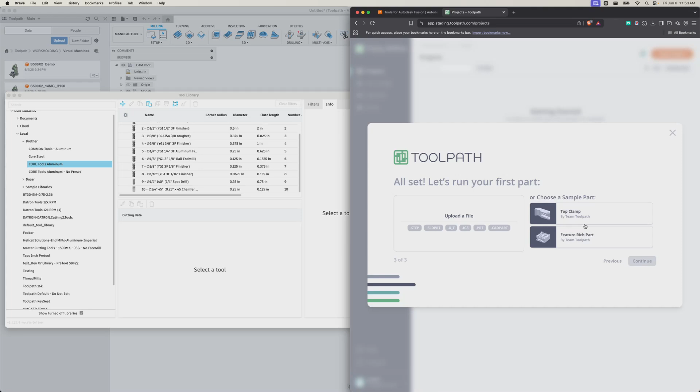So we're going to build out your machining process now. I'd already chosen aluminum there, and I'm going to upload a file. You could pick one of our test parts if you don't have one, but I'm going to grab this steering adapter part that Scott Moyse gave me. And we can see that that's running.

While that's running, I'll show you what's happened in the Libraries tab. That CORE Tools Aluminum library has shown up. I've already had that one prepped for Toolpath, so we'll leave that be. But also it created a cut config for you with that tool library selected. Cut configs are how you tell Toolpath how you like to machine, different processes and things like that. And then it also pre-populated that with some recommendations. Here we have Kennametal and Harvey tools and some generic drills, countersinks and cut taps. So that's what it's running your part with, by default, with that cut config you just built. We'll give that another moment or two to compute.

While we do, I'll show you some of the newer tool library editor stuff we've built. If you've used Fusion at all, this will look very familiar. We allow you to modify the geometry of the end mill, the presets of the end mill. There's even some advanced stuff on there, these are all the same fields you'd see in Fusion. But you can then go into a preset and edit any values you want in there, and all of that works pretty standard.

Things we're still working on here are bulk editing, so I can't mass select all of these guys yet, and adding some filtering and things like that to this table. But we're getting there. So I suspect we're good to go now.

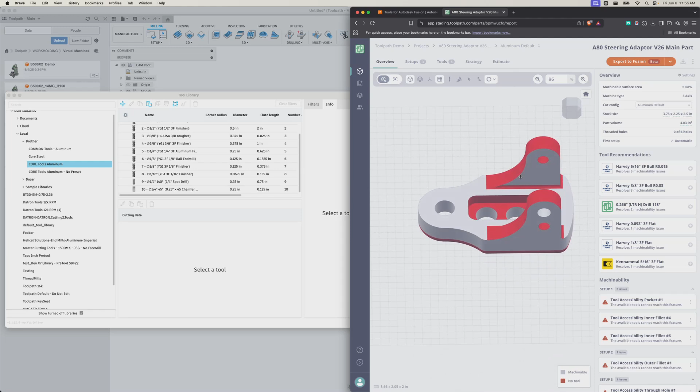So we can take a look at this part. There's actually still a little bit of calculation going on, that's why the strategy tab isn't there yet. But what you can see is that this part is mostly machinable, a lot of the primary surfaces, but we can't do that pocket. Basically anything in red we can't do - can't do this smaller hole, and then there's some contour surfaces we can't do. I probably just don't have the right tools for it in my library, but it has suggested a whole bunch of tools for us that we could use, including a drill and a bunch of other stuff.

I don't want to use those. I'm not going to buy Kennametal tools today or Harvey, but I do want to get those helical tools. So we go up to the Fusion website, and we're going to download the whole helical catalog here for end mills. I've done this a couple of times already, but we're going to download it again and replace that file.

Now, we don't quite have all the editing capabilities you need up in Toolpath just yet, so I'm actually going to use Fusion for this. We're working on that so it'll be more native in Toolpath soon. But I'm going to import that library, and it's so big in fact that it hasn't even finished downloading yet. So I think if I do this again... okay, there we go. So pull that library in. It's pretty big, so it took a second there. There's many, many, many end mills in here.

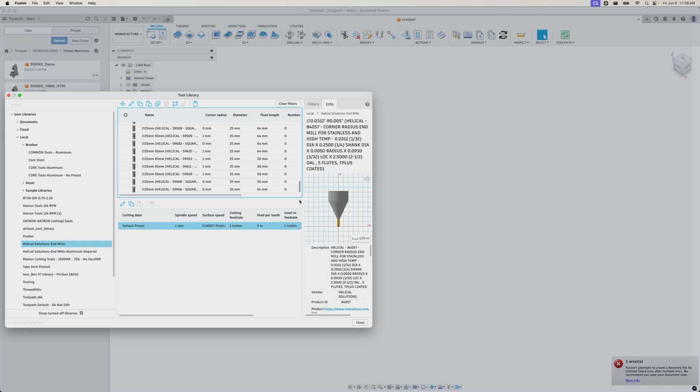So the very first thing I'm going to do is just go filter these down. I don't want anything with more than 3 flutes in it. In Helical's catalog, that's a pretty safe bet, so 3 flutes is for aluminum. So we'll apply that filter, and now we can see we have a lot of 4 and 5 flute end mills, which are there for steel or harder materials. So we're going to get rid of those.

Now, Fusion doesn't have a Control A, so I did a Shift click there, and then I'll delete these, just hit the delete key. Now, this is a lot of end mills, it's deleting almost 3,200 end mills, so give Fusion a moment here, it'll just take a second. That'll cut the tool library roughly in half, I think there'll still be 2,700 tools-ish left.

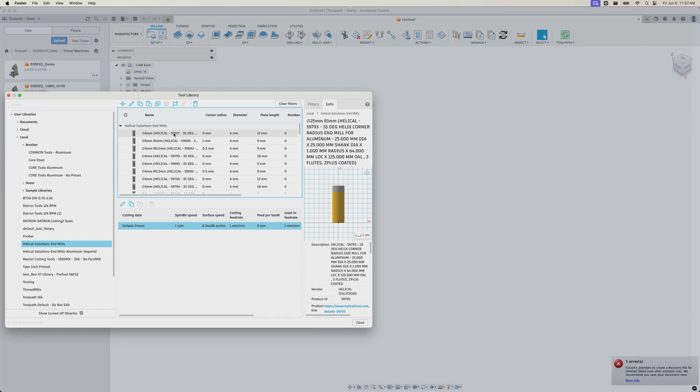The next thing I know about this library, but as we scan through it, we'll see is that there are some metric end mills in there. I don't have any metric stuff in my shop here, so I don't want it recommending tools like that for me. So I'm going to go through and just highlight all those and delete them. Got rid of another 116 tools.

And then the last thing I'm going to do is actually filter by diameter. All the machines I have here are BT30. I don't really want recommendations for any tool, say, bigger than half an inch.

So we're just going to say less than or equal to 0.5 inches, because Helical has some pretty big stuff like 1-inch end mills. I don't really need those end mills. So anything that's strictly greater than half an inch, like 5/8. Technically I can run some 5/8 stuff, but I don't like to do it. For me, that would be an uber special situation.

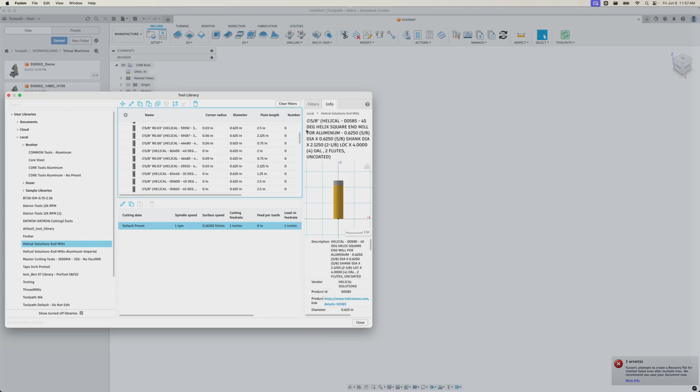So we're going to get rid of these guys. And there we go. We have gotten rid of another roughly 750 tools from that library. And we can clear all the filters. And now we're down to a set of tools that I would be pretty happy to have recommended to me, going up to about half an inch there. Right. So there we go.

I'm going to just rename this here just to keep track of it. We'll call it aluminum moon units, and they're so-called moon units. That's what Lawrence calls them because we went to the moon using imperial units. So in honor of Lawrence, we'll call it that.

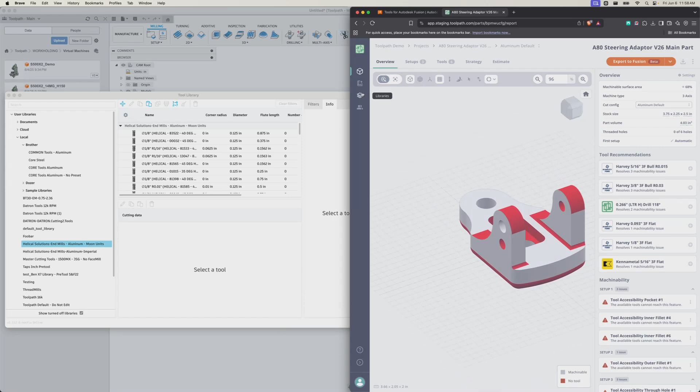I will export this library, save that, and now we can go pull that up into Toolpath. Remember, our goal here is to tell Toolpath that what we want is Helical recommendations. So the first thing I'm going to do is just upload that tool library. This is the Moon Units one. This will take, I don't know, 10 seconds or something. There's still quite a few tools in there. And now we can go look at this library and see we're almost good to go here.

If you haven't already prepped your library, click this Generate Presets button, and that'll use Pre-Tool, which is Toolpath's free tool library preparation tool, to throw some presets on there for you. You could go over into Pre-Tool and do more comprehensive editing if you wanted, but there you go. Now Toolpath has brute force applied presets to everything in a pretty logical way. Obviously, a more refined thing where you'd separate roughers and finishers out could be done over in Pre-Tool. But this is good enough for now.

We'll go into our cut config. Tool libraries is where your main cutting tools are, the ones you can actually use to cut the part. And then recommendations you're not cutting with, but Toolpath will suggest them for you, like, hey, go buy these tools or go get them out of your drawer, however you want to use it. So I just turned off the Kennametal, the Helical stuff, and the Harvey stuff. We will turn on the Helical stuff here, and now we can see these are some basic drills and taps, countersinks, and these Helical end mills.

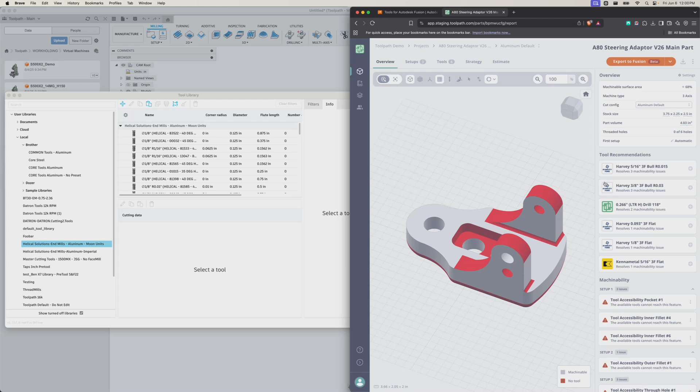We will save that, and now we'll go back and regenerate this part. It's using the same cut config, the same process, but now that regeneration will happen with the Helical tools that I added to that cut config instead. It'll just take a moment here to catch up. That's a lot of tools.

I just want to highlight while it goes how much work Toolpath is doing for you here. If we go into this library, I only have 10 core tools in my machine. That's why you saw that part have so much red. I think I have one ball mill and it's not super long, so it can't be used for all of those features. But there are still almost 2,000 tools, even after I filtered it down, in this Helical Solutions end mills aluminum moon units library. Apparently I spelled it wrong. So still a fair number of tools, and Toolpath is churning through that library for you and helping you figure out what tools you should buy.

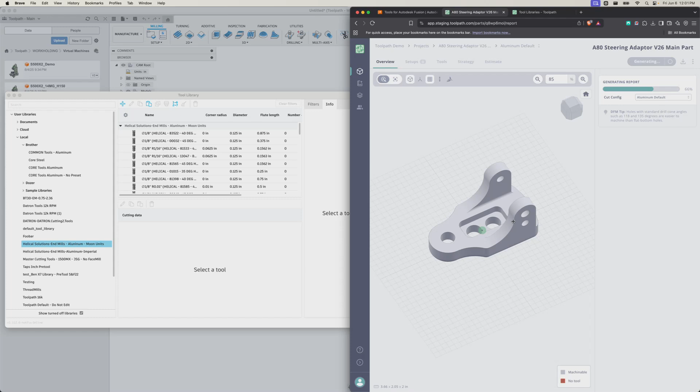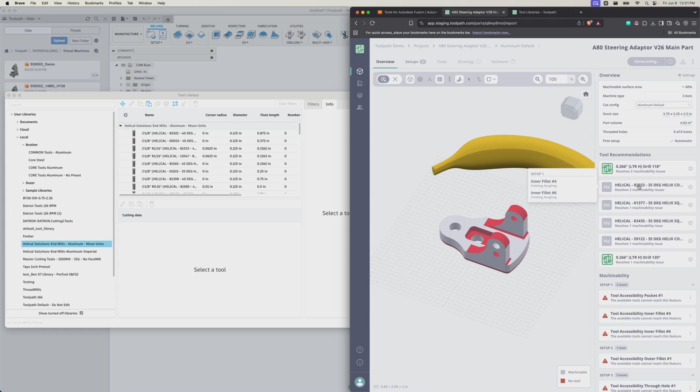So we'll see what kind of results it gives us here. I suspect we will get a lot of half-inch end mills. You've given it the entire library to choose from, and this is not a super small part. There's banana for scale, so there's room to fit some bigger end mills in there. We will see what it ended up choosing.

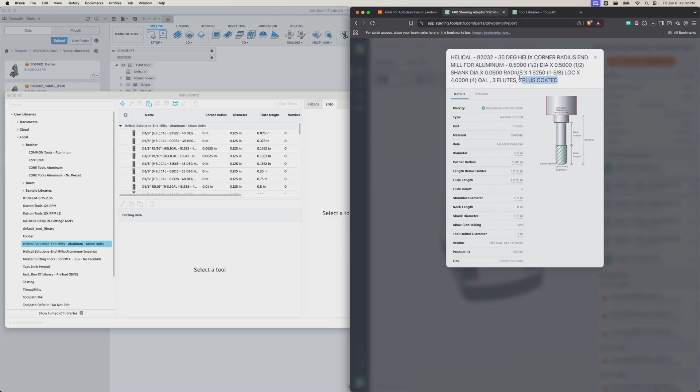So a couple of things about this tool recommendation engine. It's showing you which features are going to get used by each of these tools. And if you double click on the tool, you get a lot more information. So it chose a 1/2-inch tool with an 1/8-inch radius, and it chose it because it's the fastest way to remove material there. You double click on this and you can see we're still choosing a 1/2-inch tool, this time with a 60 thou radius, and there's that coating I was telling you about, so we haven't removed any of the coatings.

But there you go. That is a fully programmed part. Well, I guess not quite yet. We still have 68%. So what you would do now is add in these tools. You see there's some stuff here, like this drill showed up twice. I'm just going to only pick the one drill. It should be fine.

A little bit more work we can do there to compact this down a little bit more. My suspicion is that many people wouldn't want to buy a bunch of 1/2-inch end mills just to make this part. Those tend to be a little bit more expensive. You might choose something smaller. Maybe that's some more future work.